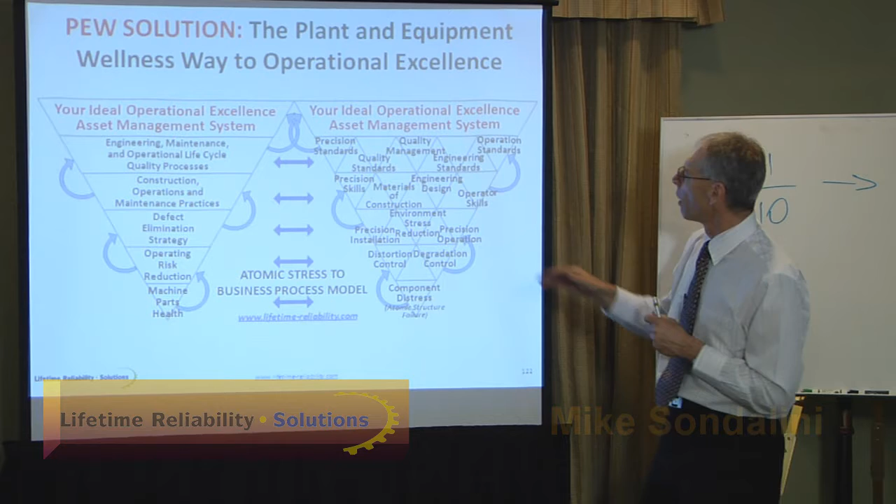So I want to build from here, from this concept of minimising stress in my parts, through a series of activities right up to the actual business system running the company. What quality standards must I have to deliver the precision required to achieve that low stress? What engineering standards give me that? What operating practices give me these controls on distortion and degradation? So at this high level here, it's about the business processes and the systems the company uses to create this outcome.

So when we analyse a company's assets, we keep pushing up our understanding from what fails it, what controls it, what processes must we use, what skills must we use, what engineering and maintenance and operating and financial practices must we adopt, what procedures and practices and documents and processes do we lock into place that then give us the asset management system that produces the results that we are trying to design.

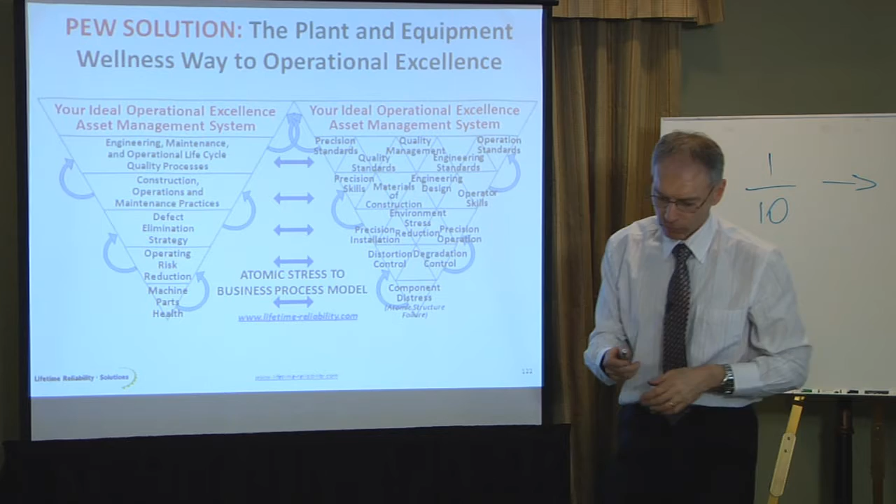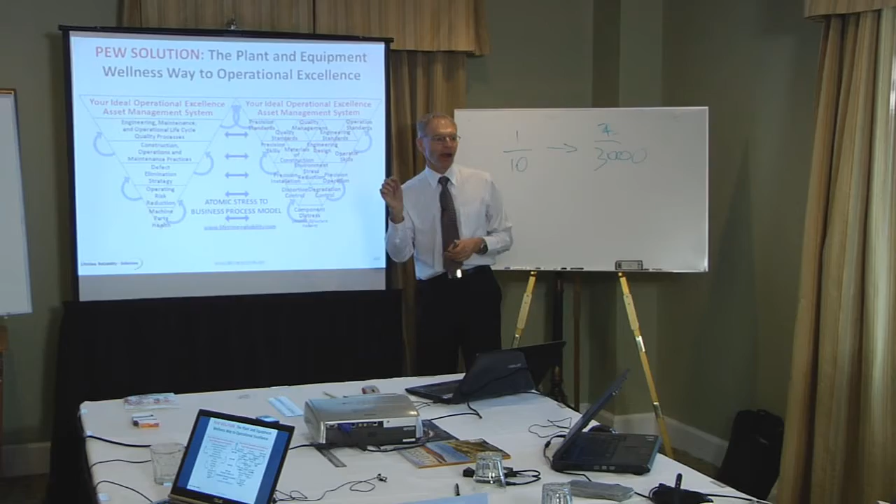Where would you put ACE3T? Let me step on to the next step. The accuracy controlled enterprise is the complete system that captures all these. Okay, so you wouldn't just put it in the top line? No, the 3 T's you'd actually build at this level here, because what operating target must we run at to ensure that when the plant operates, it's a nice steady flat line. Pressures, flows, gravities, temperatures, whatever the case is. So all of those are done to that standard ACE3T?

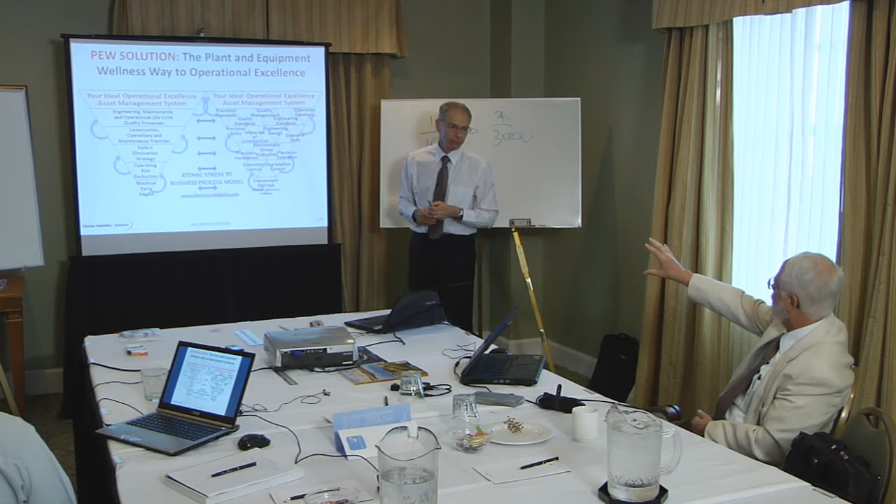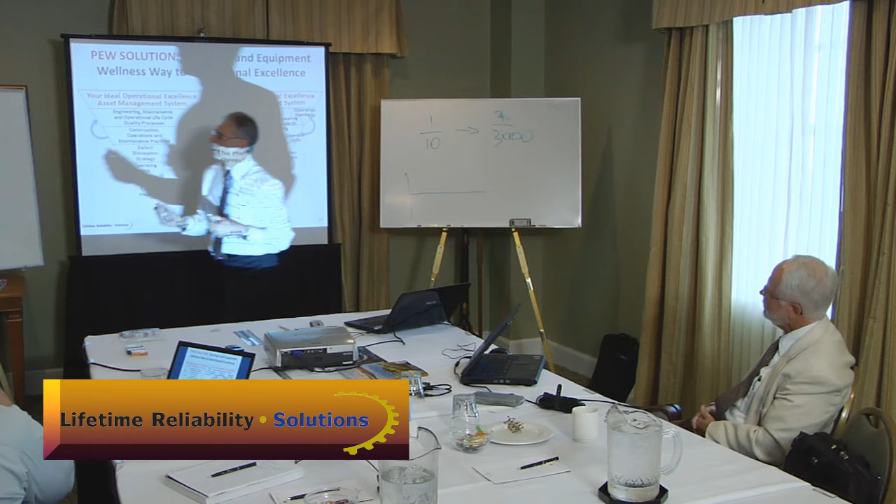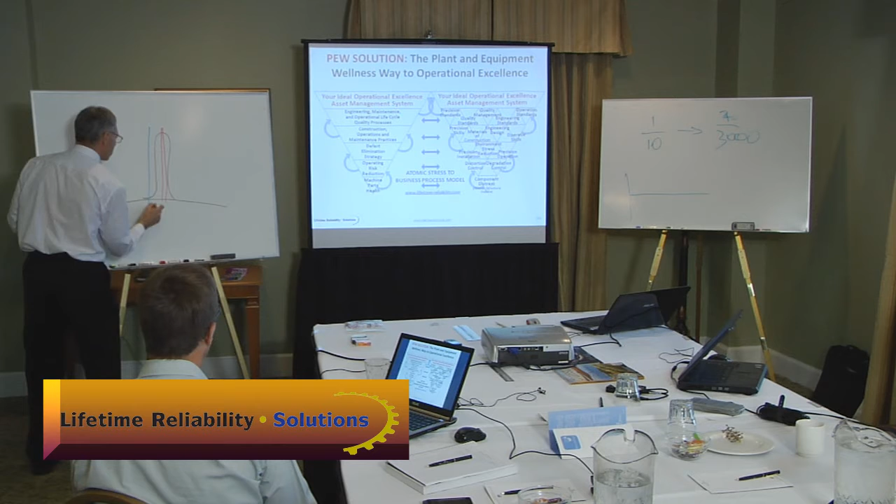Yeah. Because the 3 T's are the target tolerance test that gives us the narrow distribution that we're looking for. The 3 T's create that very tight distribution. So I've got to have the 3 T's. If I want to have a tight distribution, then I've got to have what is the target that I'm looking for, and how big a boundary will I accept, and then setting those parameters sets the limit on my process. And of course the final T, the actual test, is to prove I'm within those boundaries.

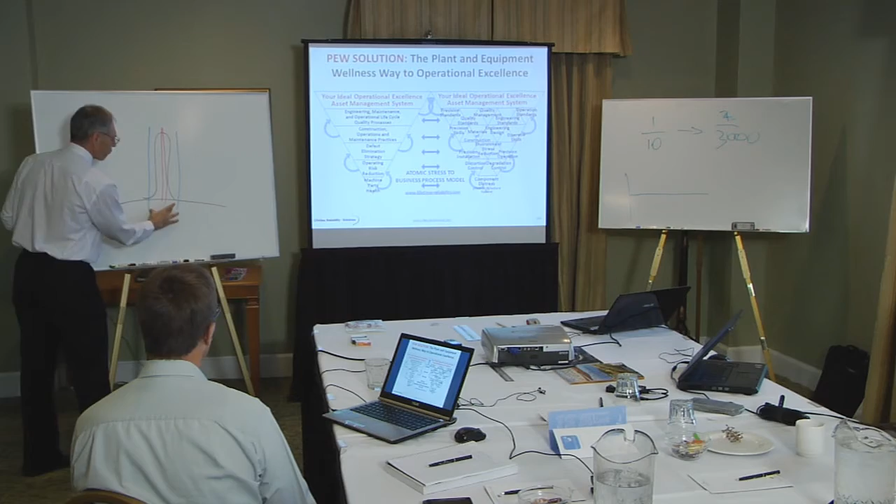So yeah, we're going to use the 3 T's, or the concept of that, across all the documentation we're going to build. Up here is the documented systems and processes we're going to run the company with to create that reliability that results from low stress operation of our parts.

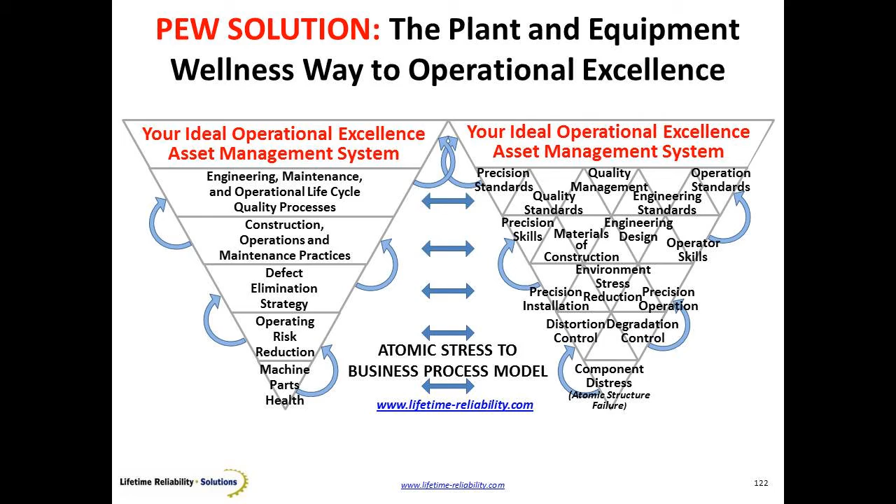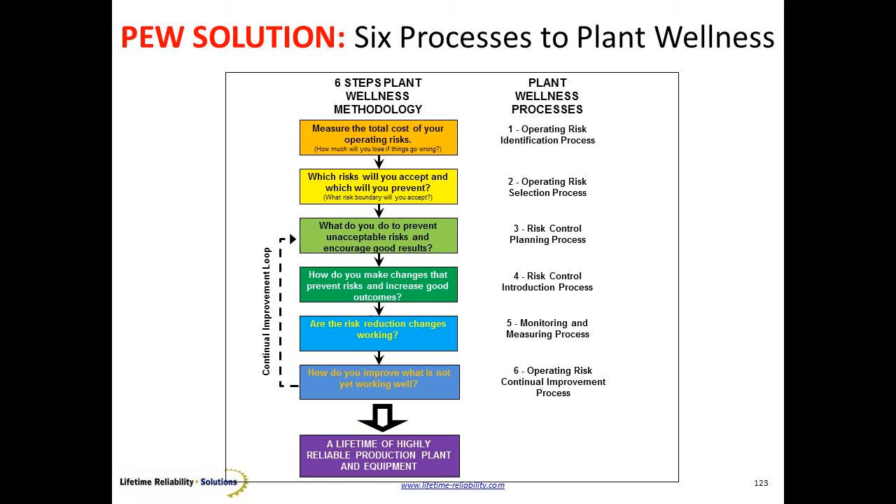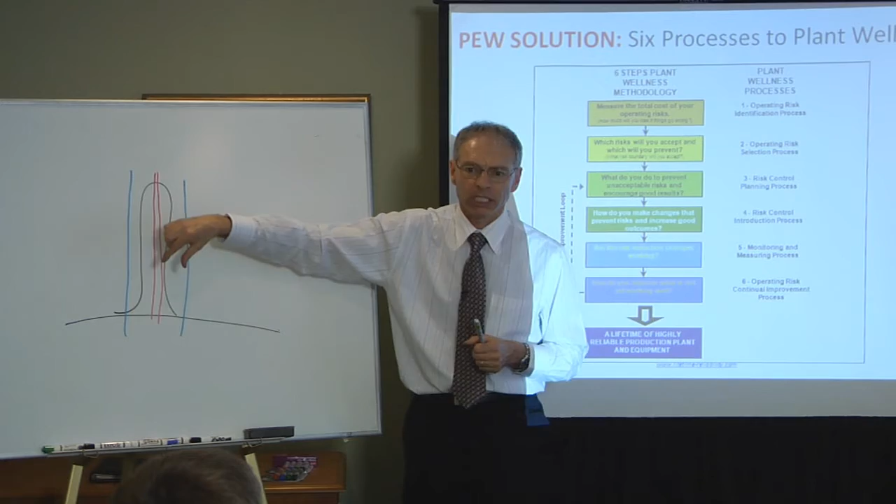Now tomorrow we'll talk about the 6 steps in the process, because it's all about recognising where the risk is in the machine, where the risk is to the operation from having those risks to the machine, controlling those risks in the operation and in the machine, introducing the right processes to control those risks, monitoring the processes that are actually working, and then ensuring we are always improving, looking to refine this boundary narrower and narrower and narrower. Because the more precise I am, the more reliability I'll get, the more accuracy I get, and the less breakdowns and less problems result.

So yeah, this one's a bigger triangle, and I chose triangles because triangles are the strongest structure in the universe. When you look at the strongest designs, everything's got a triangular shape. It's the strongest structure. So the concept of having a triangle made sense in building robust business processes that are strong, that support the business, that deliver the outcome that you want. So it's the same thing here. Here I've got more definition from those previous slides.

So again, part health down to operating practices and maintenance practices, 3 T's and writing the precision requirements that are necessary, choosing the materials of construction. Now we're down to the design phase of that life cycle. Here we're into managing the actual operation with quality practices, supply chain control, lean practices. There are some good lean things that we don't even want to question. Just bring the good practice in. If that lean practice gives us low stress on our parts, go for it, because that practice will create reliability. Why wait? And on we go into our business structure.

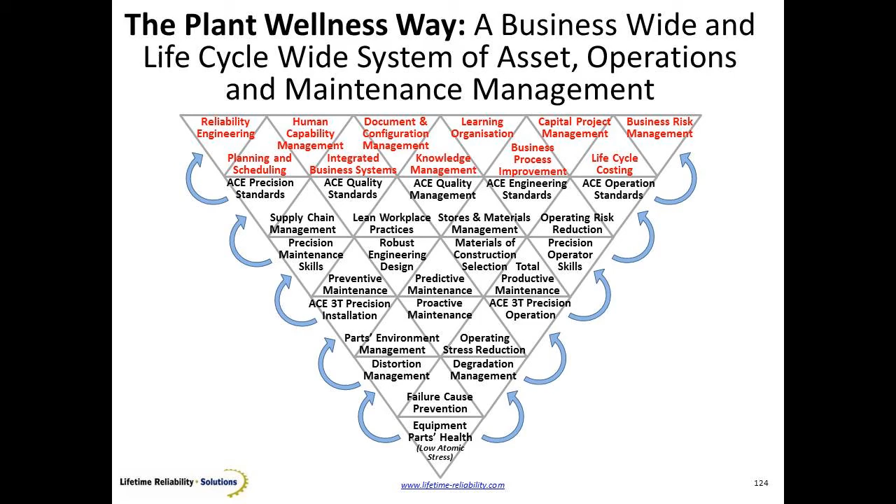So up here is all the things a business does that are built from the right thinking. Everything snowballs upwards into the processes that lock that result into place. Most companies go the other way. They build the business processes and hope the right results come out, which gets them where they are today, because everything depends on luck then. It's all hoping the right things are going to happen. He was saying, what are the right things to do to create the reliability and put the right things into place across the whole business, across the whole life cycle.

So it's about maximising life cycle profit with markedly reduced human error and greatly increased work quality results by delivering the least maintenance commitment while producing world-class reliability that brings operational excellence performance through creating one single holistic business system to address life cycle cost issues and reduce variation and produce the lowest operating equipment risk profile that results in the least operating costs forevermore.

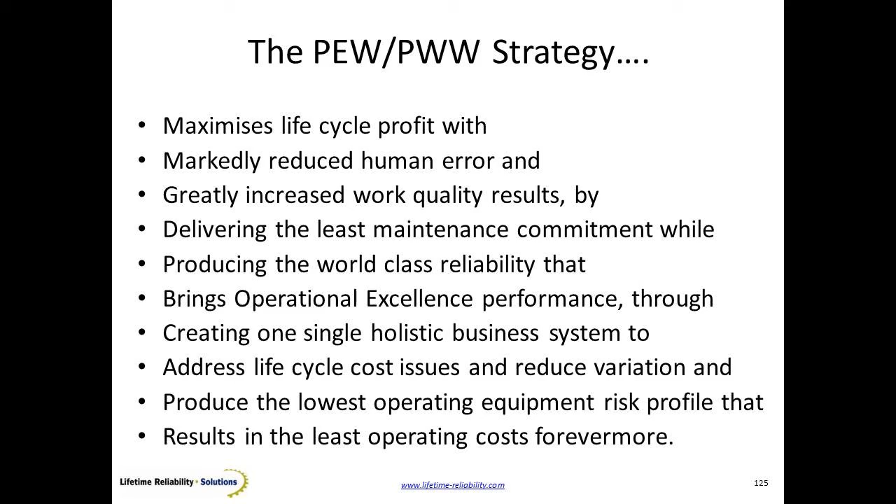So it's a methodology, a step-by-step process across the business requirements that produces maximum profit optimally. And that's what we're trying to build in the Plant Wellness Way. Just one technique everybody uses that a company applies in its situation that is right for that business.